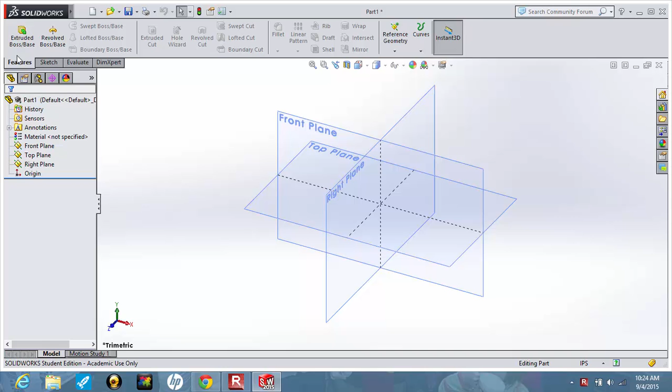I'm going to do an extrude boss off the top plane. This is a very symmetrical part, so I'm going to put it right in the middle of the planes, and do a center rectangle. This thing is 6 inches by 4 inches, so I'm going to try to stretch it close to that size, and then smart dimension it.

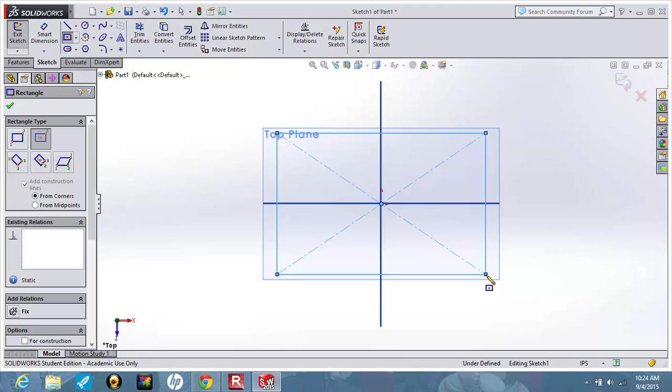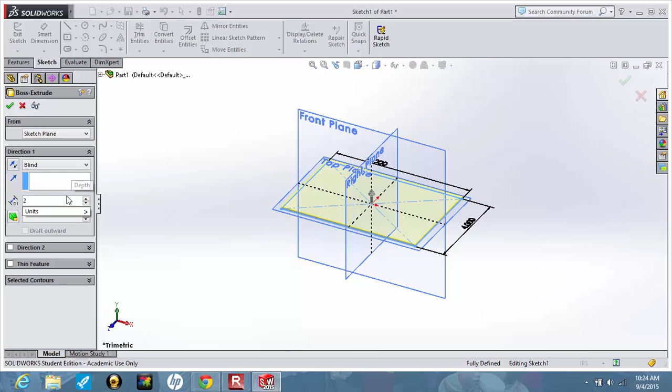It's going to be 6 inches, that's going to be 4 inches. I'm going to exit my sketch, and make that 2 inches tall. And there I have my first piece.

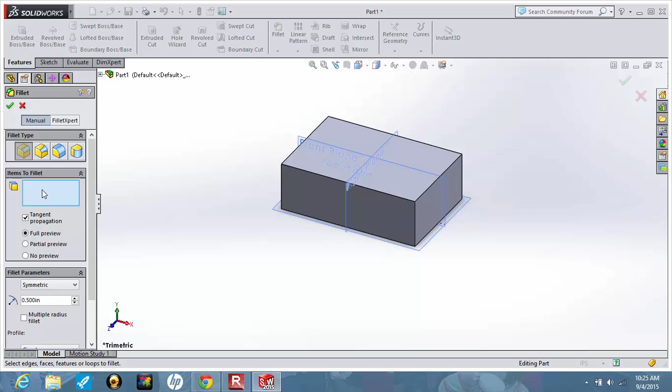The radiuses on the corners are 0.5 inches, 0.5 inches, half an inch. So I'm going to go ahead and select fillet, make that 0.5. And for the edges, remember you can select one edge, and then if you grab this guy, all 4 edges are selected, and now you have basically the shape for the bottom of the part.

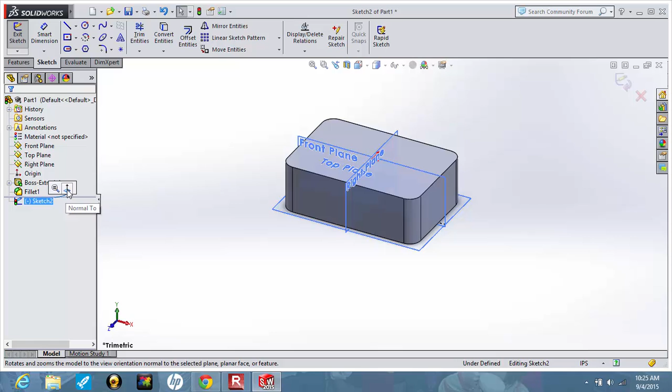Now there is a round portion that is 2 inches in diameter, and it goes up 1.5 inches. So I'm going to select this top face, and do an extruded boss. Again, I'm going to go normal to it, so I can see what I'm doing, because you always want to look straight down on your sketch.

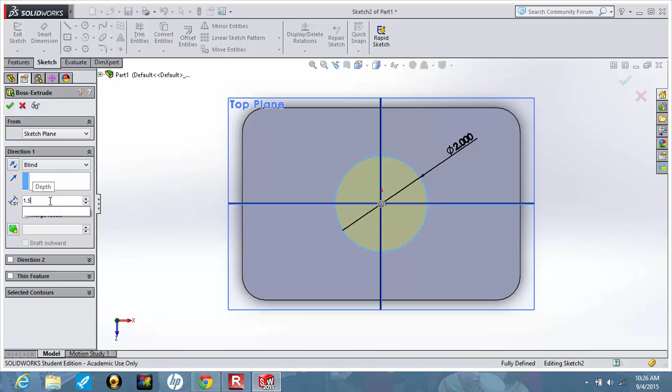Again, highlight the center, here's my circle, going to smart dimension it. This is 2 inches. Check, I'm going to exit my sketch. And remember, this goes up 1.5 inches. Check.

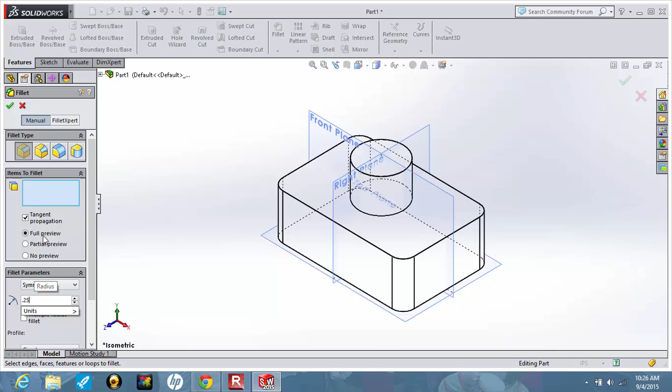I'm going to go to hidden line view, because that's often easier to see. The radiuses in the corner here are a quarter inch. It doesn't say what the radiuses are on these edges, but I'm going to assume it's the same quarter inch. So when I do fillet, instead of half inch, it's going to be 0.25 inch. If I select this top face, it's going to give it to me both there and there. So I select check, and now I've got that.

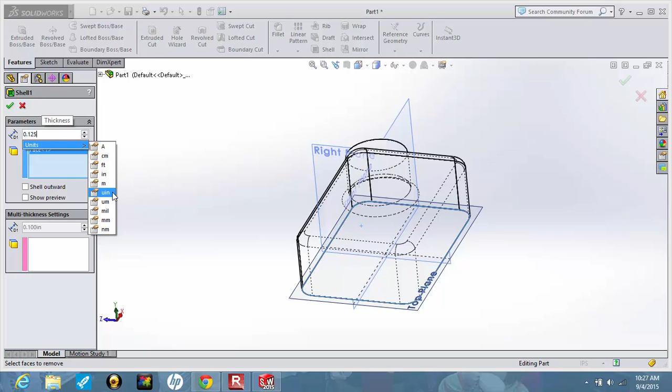Now what I want to do is go ahead and do the shell. So I'm going to select shell, select this bottom face, and now I need to put in what that wall thickness is, and according to the drawing it's 0.125 inches. Hit check, and that gives me that whole thing.

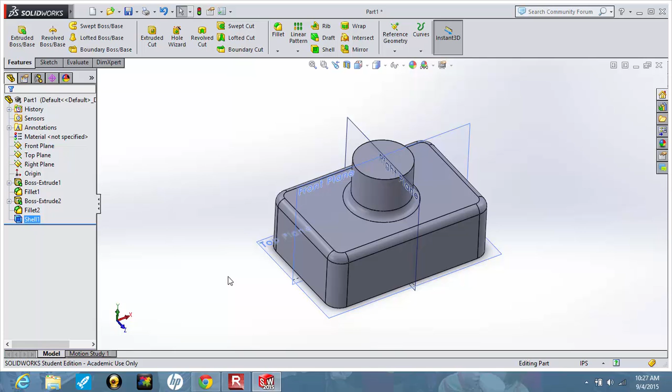I'll go back to this so you can see. Okay, so the only thing wrong with the shell is if you look at the cross-sectional view and the ISO view, that's supposed to be a hole. So I'm going to go back to my hidden line view, and what I want to do is cut a hole in this top surface.

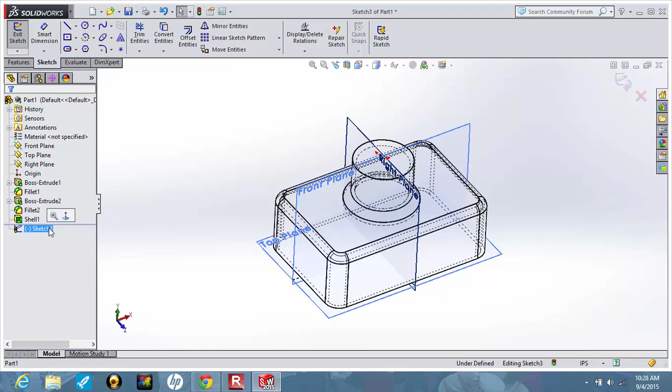I'm going to do an extruded cut. Let me start that over. I'm going to select this top face, do an extruded cut. There we go, and again I want to look straight down. I'm going to convert entities, and select that line right there. Check, and that's all I need for my sketch.

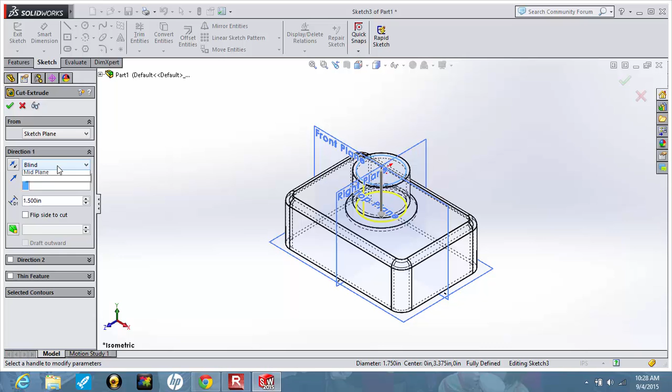Now if I go to ISO view, I can see I'm going to be cutting through, and I want to say through all. Check.

And now if I go to this view, now I've got that hole open. So again, this is where you can use convert entities and offset entities and such to do what you need to do very, very quickly. So that works out nicely.

Okay, so we're in this ISO view, and there's a couple of cutouts in the walls. It's important to note, and you can see this in section AA very well, that these little cutouts in the sides don't go through both sides. They're only on one side. So this is where we're going to use that up to next or up to surface type of selection, so that we don't cut both walls.

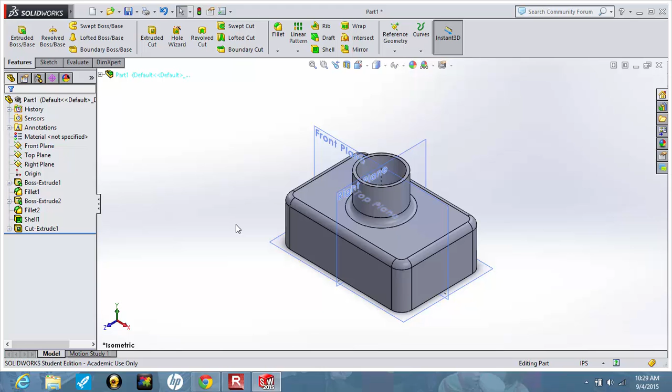My first cut is going to be through that surface, so I'm going to do extruded cut. I'm going to go normal to so I can see it. I'm going to do a corner rectangle, and although it is symmetric... I'm going to use a center rectangle.

So I'm going to select anywhere on this center plane because I want it located in the center, and then if I let this touch this edge, it'll do the alignments that I want.

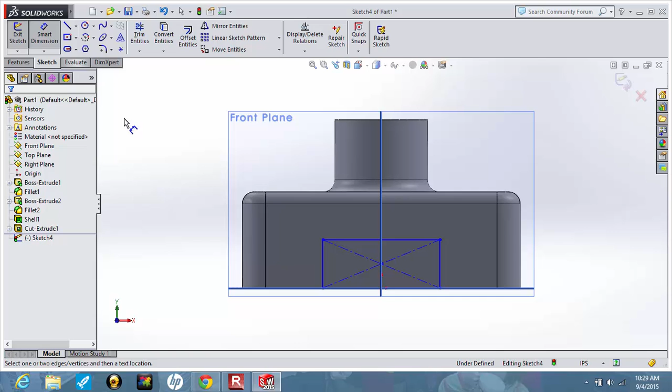And then the nice thing is when I do my smart dimensioning, this is 1.5 in width, and then if I select this side, it's supposed to be a half inch in height. And notice how it stays aligned to this bottom edge. So again, if you can utilize the planes, utilize symmetry, utilize the snaps, you can do these drawings pretty quickly.

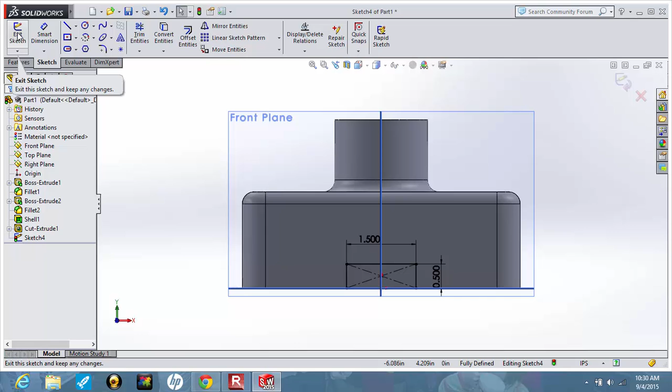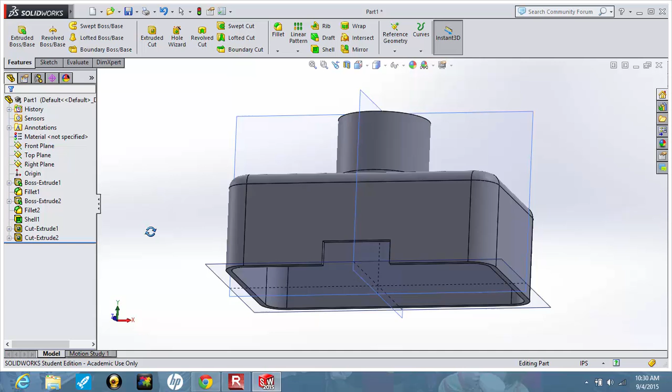And so I'm going to exit my sketch, and instead of blind, I'm going to do up to next. And when I rotate this, you can see that I got just this wall and nothing else. So that's all I wanted to do.

So now my next feature is a similar kind of cut off this wall. And so I select the surface, say extruded cut. Now I'm going to go normal to, so it rotates everything around.

And this is going to be a semicircle. I'm going to take this center point arc, and I'm going to be able to snap right there. And then I'm going to be able to just draw an arc from there to there, and it snaps. Select check. I'm going to smart dimension and make sure this is 1.5 inches.

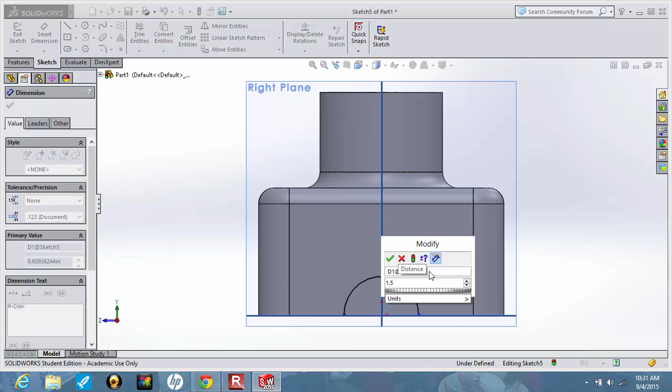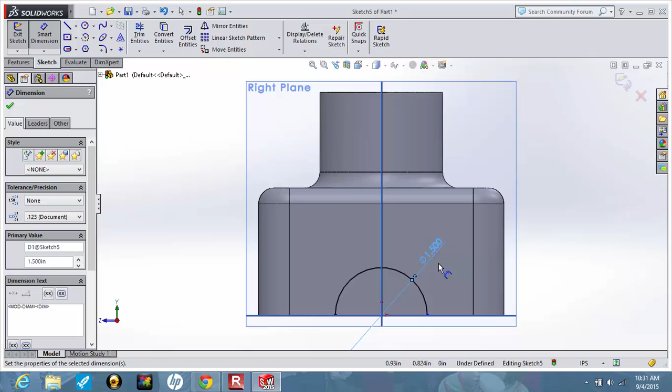And I wonder... yep, that's too big. So I want to display as diameter. Now that I've got it as diameter, I can type in 1.5 and get it back. So that happens. There's a lot of times you have arcs that are given diameters instead of radii, and you can switch back and forth as display as diameter or display as radius, and you can fix the doubling or halving of the dimensions that you get.

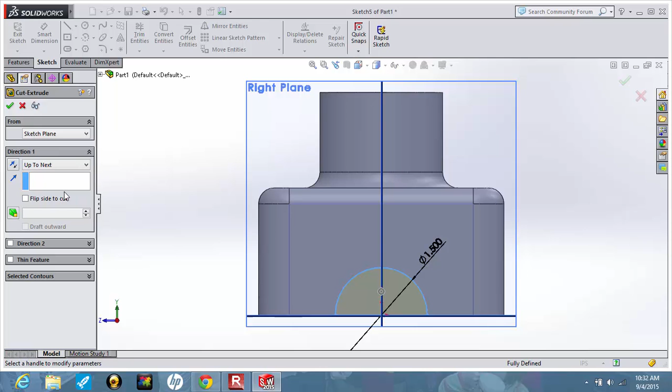Again, I need a closed profile. So right now I have my arc, but now I need a line to close this profile, and it's just going to snap to the endpoints of that arc. And check. And so now I have a closed profile. Now I can exit sketch, and again I'm going to do up to next, check, and again I have my cut exactly as I want.

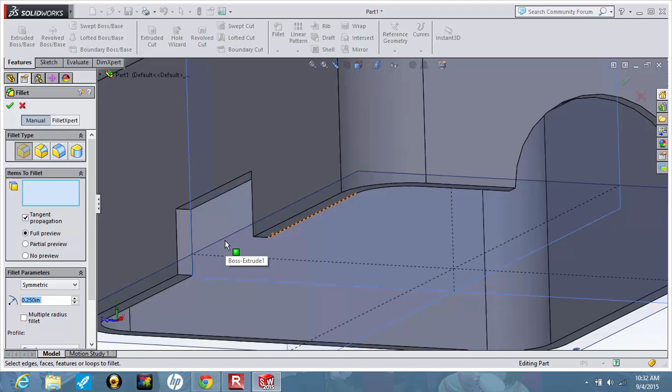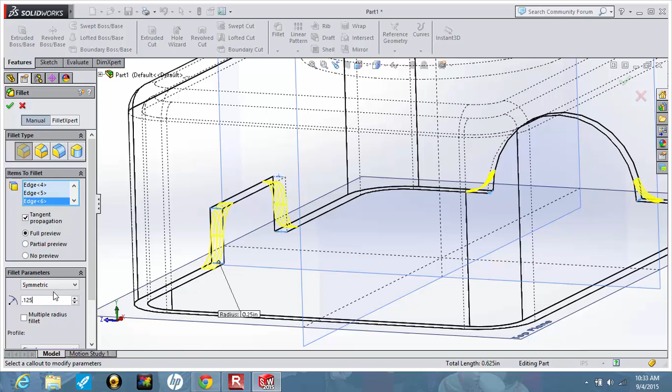Now the last feature to add is there are a bunch of radii in this, and so I'm going to select the fillet tool, and I'm going to zoom in, and go back to this hidden line view so it's easy to see. So I'm going to select that edge, that edge, that edge, that edge, that edge, and that edge. And it's supposed to be 0.125 of a radius, so that's 0.125. Check. And I'm going to hit OK, and now I have completed this piece.

So that's all you really need to do, and then save as, and this is going to be exercise 7 JMH, and you just need to put your initials on it.